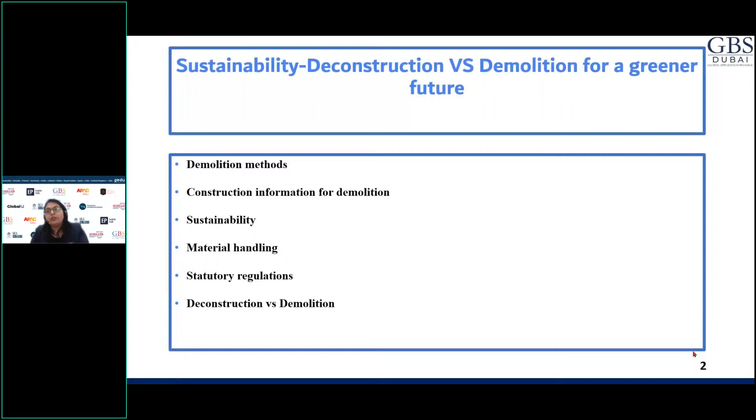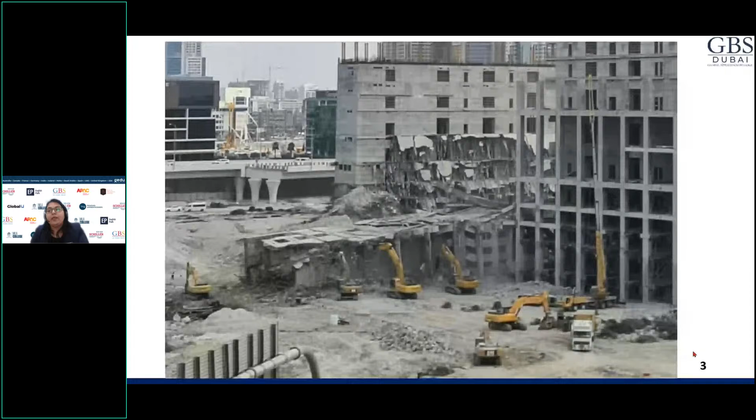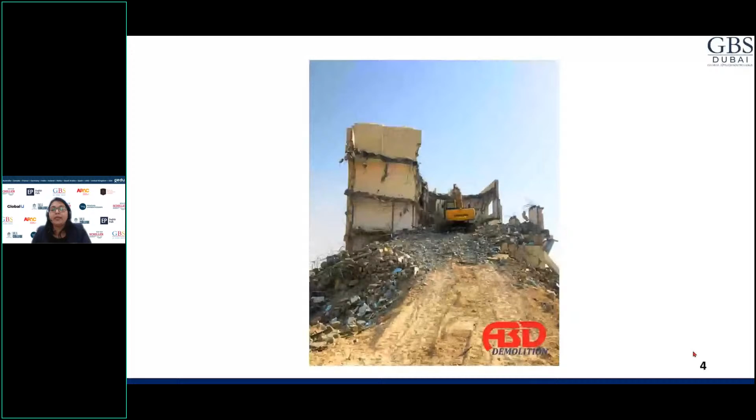Some old buildings, because of their historic importance, they will try to renovate to the maximum, but in some cases, they will be allowed to decay and eventually collapse. But that is not applicable in this landscape, because that will be considered endangered or dangerous to all the people, and then it will be demolished. So this is the third case wherein the building will be demolished.

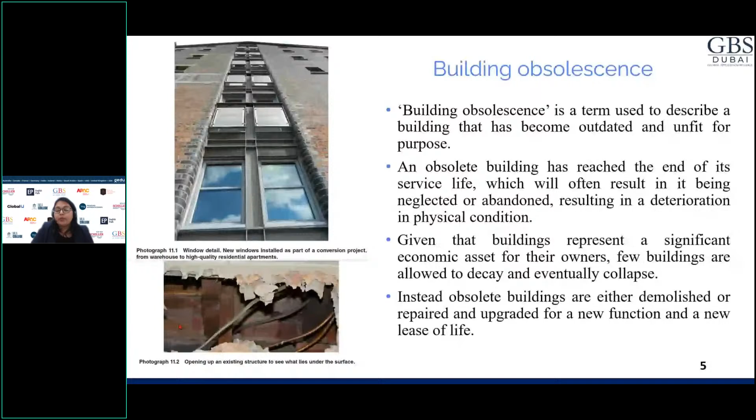Let's see some of the demolition methods. Mainly we can do it by using hand demolition, by using machines, or by using overturning or wire rope pulling, and by using explosives.

Some of you must have seen these kinds of demolition methods, and as a child I was always fascinated. I've seen some buildings, some videos, some pictures where the demolition of certain buildings, bridges or any kind of structures happened. So let's go through these demolition methods in detail.

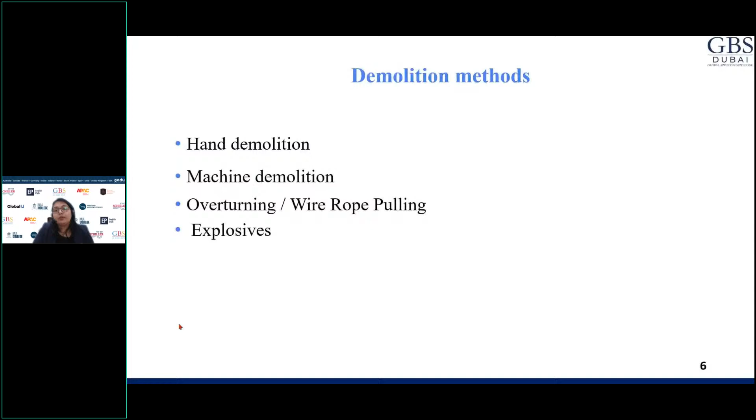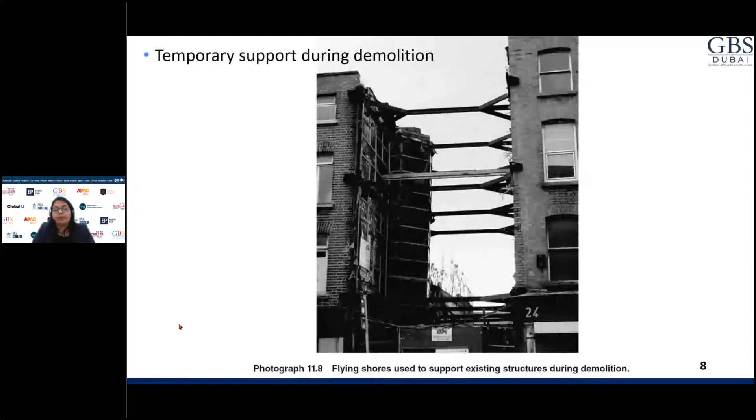Now, let's focus on hand demolition. This hand demolition will be done for simple projects, meaning only a part of the project may be required to be demolished, to be removed. When it comes to works like rework, it can be considered as hand demolition.

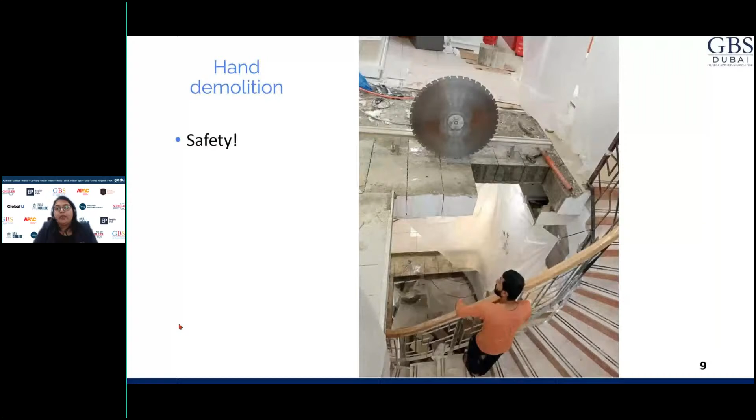Now, when it comes to slightly larger buildings, you will go for machine methods. Machine methods are of two types. One is the ball and crane method, which we also call the wrecking ball method. And the second one is by using demolition excavators.

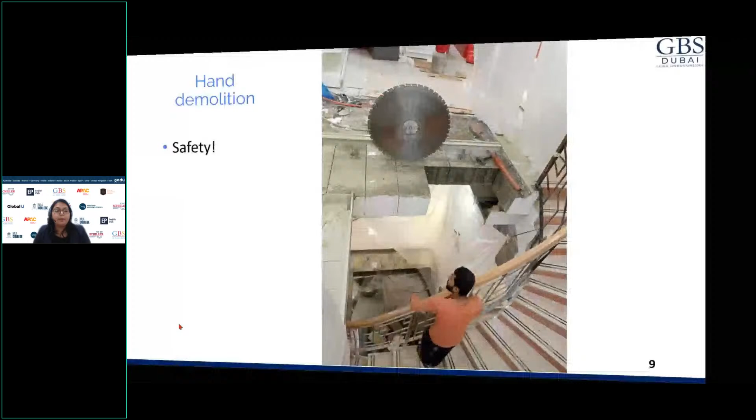Now, let me show you an example of wrecking ball demolition. Okay. All right, there is an advertisement which will be, yes.

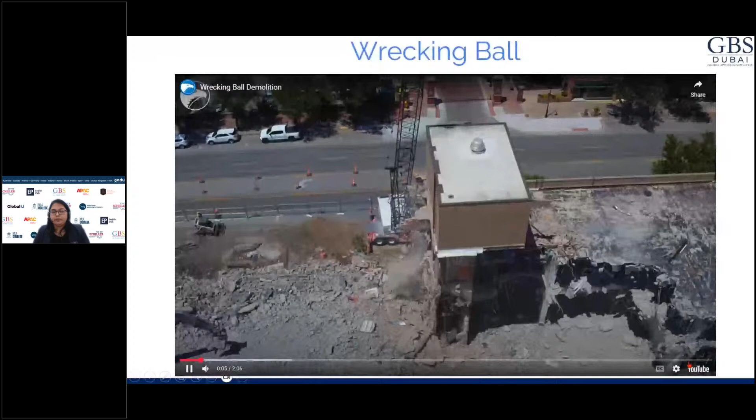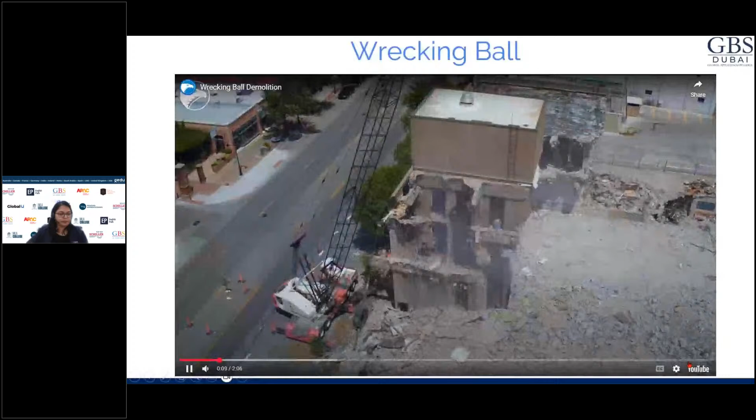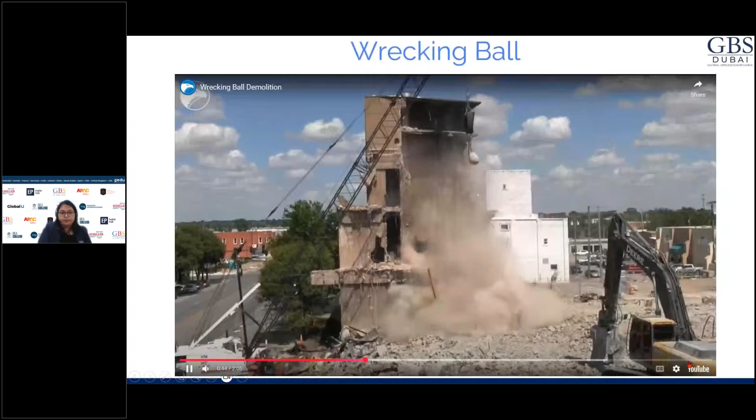You can see here a wrecking ball and crane arrangement which is used for demolishing this old building. You can see it's a rural area, not thickly populated and so on. Yeah, this is a demolition excavator which has been used to remove the further debris.

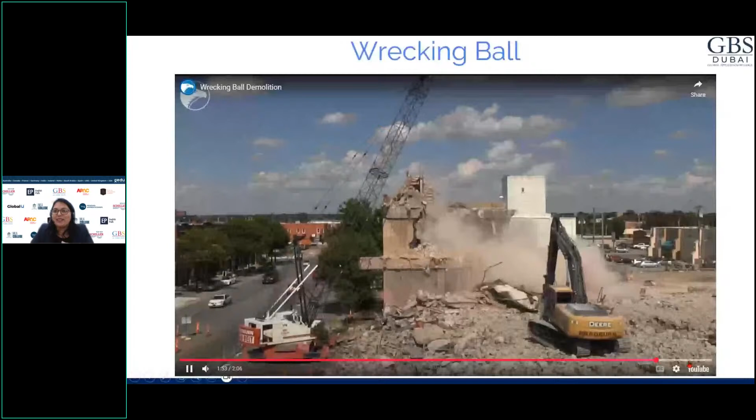All right. So you have seen the video of how this works. Usually it is a combination of different methods that is used. And if you see the noise, the vibration, the flying debris, the practices followed are not up to the mark. So these kinds of methods are only applicable in rural areas, and there should be a fencing arrangement, which is missing on this site.

And you could see a lot of people who were fascinated and looking at the demolition process instead of taking care of their safety, right? Because there is always a chance of collapse at any moment when you're trying to demolish. So there are different regulations in place for demolition, especially in UAE.

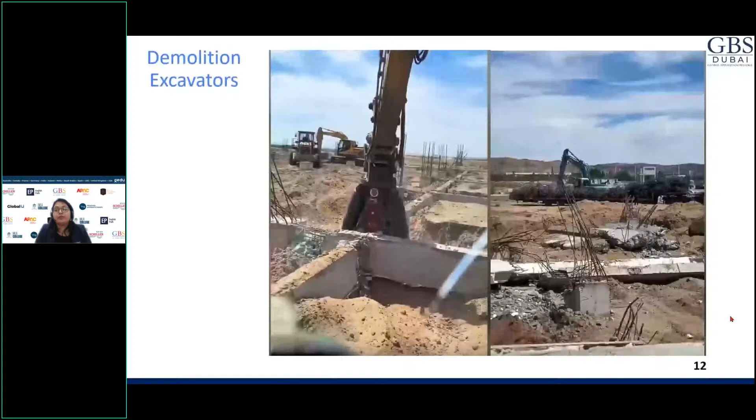So this demolition excavator is used in these kinds of confined areas and also for small buildings. But the wrecking ball method you can use for rural areas where you don't have many buildings nearby, and where noise and vibration will not be much of a problem to other people.

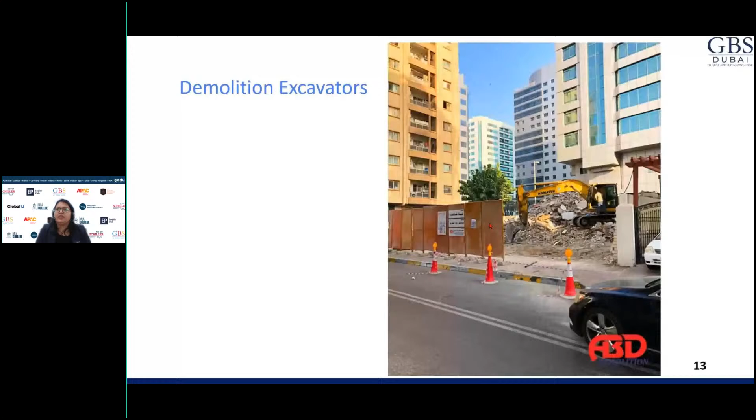Explosives. I'm sure you must have seen a lot of videos showing the demolition of multi-story buildings. So definitely when the project is huge, which needs to be demolished, and is not yet completed or was on hold for many years, they make use of explosives to demolish a building.

Sometimes within a minute, within 10 seconds, and so on, there'll be flying debris, but they make sure that with the design there will be minimum damage to the surrounding buildings. There will be vibrations, and surrounding buildings need to be protected as per the law. And if there are any roads near these kinds of buildings, people will be evacuated, and there will be road closure throughout the day or maybe till certain times.

After the explosion, they have to clean up the dust from the surrounding areas before they get a demolition completion certificate. They also have to make sure that there has been no damage after using these kinds of demolition methods.

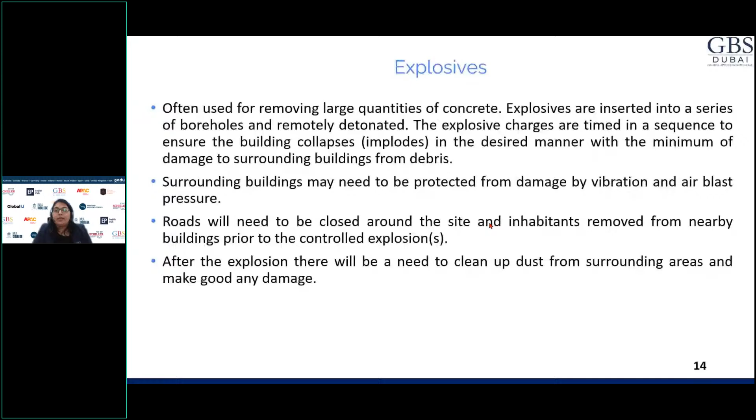I'm going to show you another video which will give you information about explosives, if you have not seen any of these kinds of videos before.

This is a controlled explosion, which was done in 10 seconds, combining 144 floors across all 4 towers together.

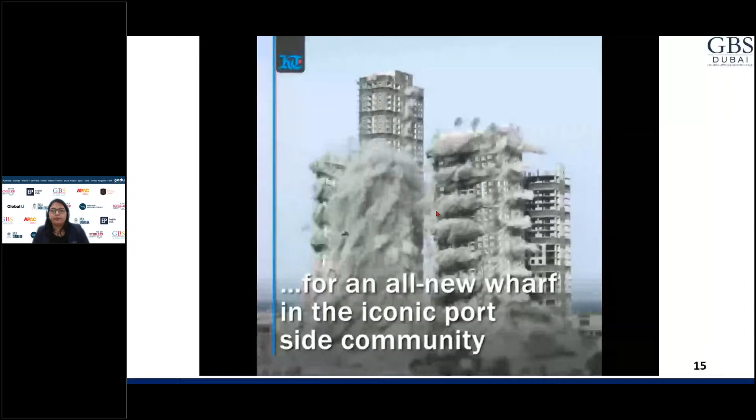By using any of these types of demolition methods, you need to have construction information in place just like any other building.

For demolition, for getting the approval, you need to have as-built drawings. Along with that, you need to have a building manual in place, which gives you information about the specifications, the materials that have been used, and all the maintenance that has happened throughout the life cycle of the building if it was used. Building information modeling, using software like Revit or similar, will help you in the process of demolition.

You can see in this picture, taken from Build in Dubai, the website which gives you information about Dubai municipality regulations. Here you can see, starting from building design, when it comes to owner services, and when it reaches the building after completion, which has been used for either renting or selling.

After that comes building maintenance, and modification if required. They will try to see if the building can be reused, repurposed, or anything else. Only after that, if it is not fit for purpose, will they go for demolition, which is also a sustainability criteria.

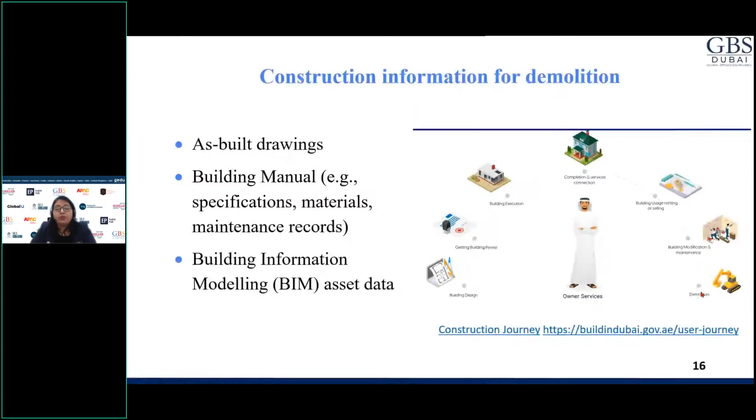The information that needs to be gathered before any demolition process, we call it a demolition survey. You need to find out the existing services, which could be live or already taken out, so the existing building services details need to be understood. In an old building, sometimes we don't have BIM data or any other information, so you have to actually check and find out these existing services.

Then, if there are any watercourses, be it natural or man-made, you need to understand that. You also have to understand the presence of any building materials which could be hazardous, used during construction or during maintenance.

You will have an idea about the distribution of loads, how the loads are being distributed, which is a critical factor in demolition design, and the condition of the building structure. If it is highly unstable, they have to consider it as a risk and go with some precautionary measures.

You have to identify all the risks and hazards involved, because this is one of the most dangerous operations in the built sector, along with the distribution and position of reinforcement.

You need to know the allowable loading for each area, whether demolition equipment can be placed on it, and the stability of the structure. You also need a survey of neighboring buildings so you can anticipate what kind of damages to expect and how to mitigate them, and how loads are transferred if there are adjacent structures connected by bridges, pathways, or anything else, along with access to the structure. Everything needs to be surveyed before these kinds of operations.

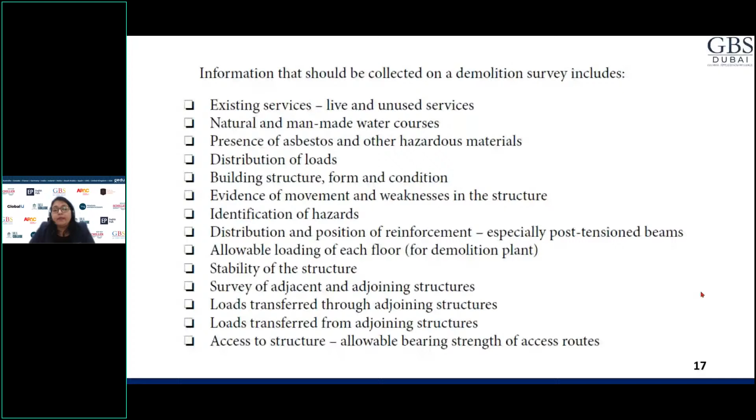Health and safety is a must, along with recycling and reuse of materials and disposal methods. If anything remains, there will be minimum waste to the landfill after sorting the materials which can be reused. Those things need to be included or discussed prior to the demolition.

After demolition, they again conduct a survey to determine the extent of damage to neighboring properties, and there will be clauses mentioning what could be done in case of any damage. Every time, demolition procedures are carefully undertaken, and it is the contractor's responsibility to clean up all the dust and debris from the surrounding areas after demolition in order to get the demolition completion certificate.

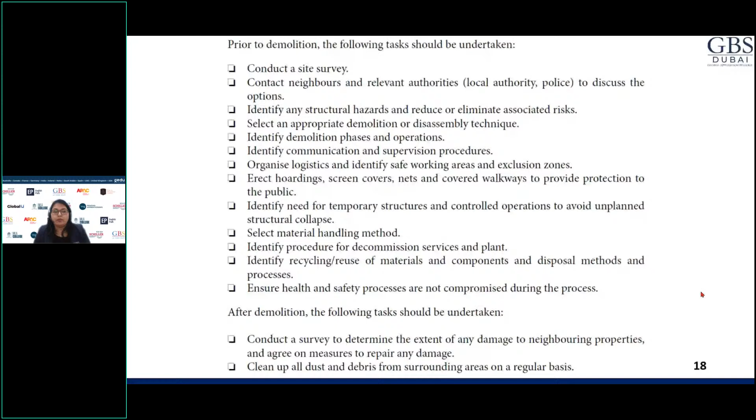In order to establish the noise and vibration that you hear during construction projects, I'm going to show you another project. As you can see, you can hear the noise, and you can anticipate the vibration when it comes to these kinds of structures.

Sometimes they will have to use demolition excavators initially in order to minimize the load for demolition in this case.

Let's talk about stages of demolition if the building was in use, and they had to demolish it for some reason. Maybe they would like to redevelop the area, or maybe the building has completed its design life and is no longer fit for purpose, or any other reason which leads to demolition.

If the building was in use, they can initially do a process known as stripping out, wherein all the valuable materials, components, and equipment that could be reused are removed very carefully as a safe extraction of items, and their value can be retained. These components, once safely removed, will have some commercial value.

Following this soft strip, you can go to the main demolition stage, which starts from the top and extends to the floors below and then to the foundations. Always remember the demolition process after soft stripping starts from the top and follows towards the foundation level, and from the exterior of the building towards the interior, in order to make sure there is no sudden collapse of the building which can cause problems to people nearby.

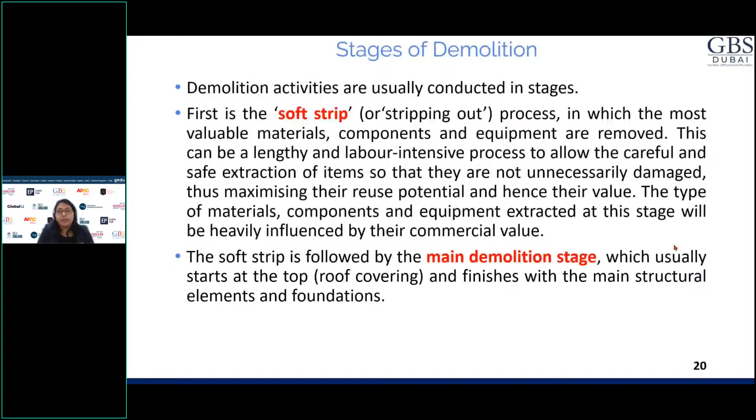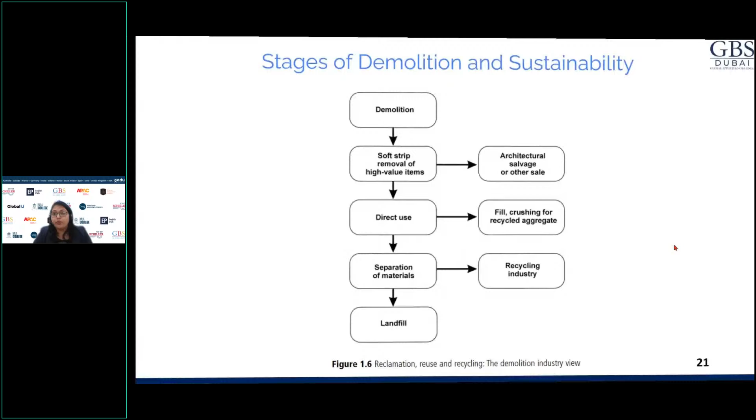When it comes to stages of demolition and how it connects to sustainability: if a building in use needs to be demolished, first is the soft strip, and some pieces will have value, sometimes higher value, which can go for architectural salvage or other sales. Some items can be directly used, and sometimes they need to go for recycling, where those items are separated and sent to the recycling industry.

After the separation of materials, there will be some materials which cannot go to the recycling industry, but have to go to the landfill. So what we aim for is minimum wastage towards the landfill.

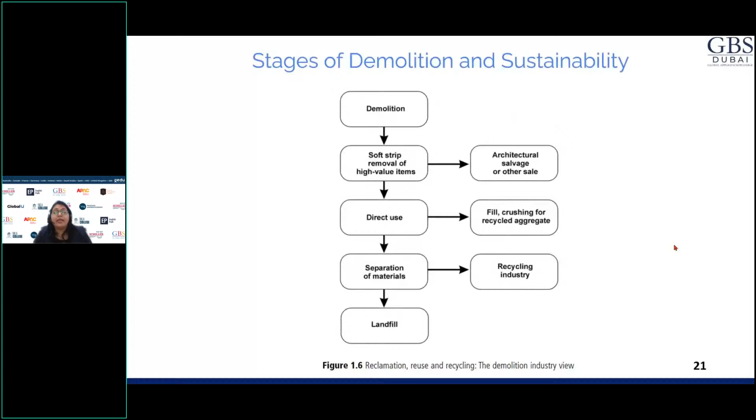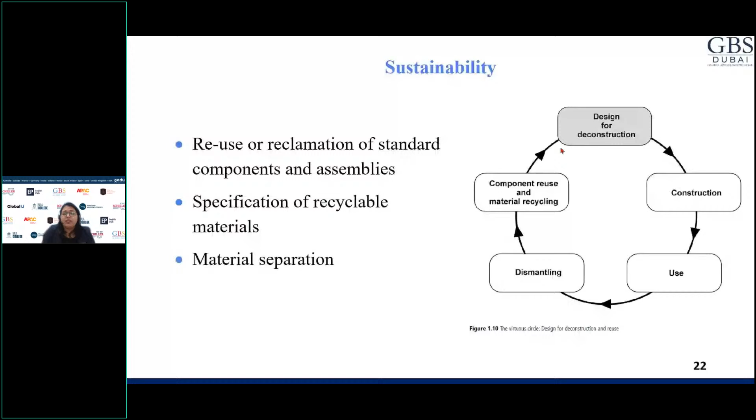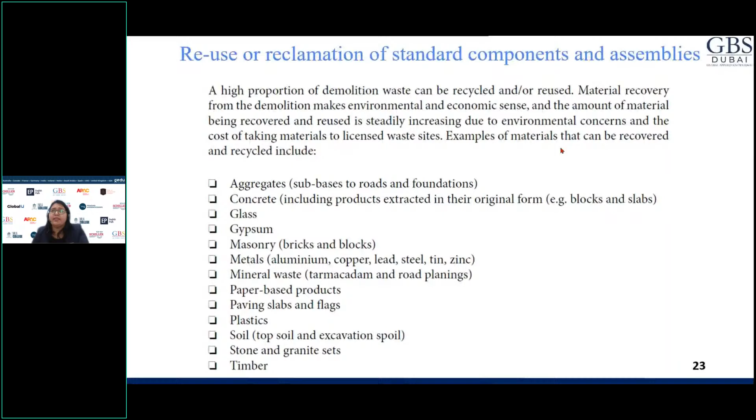The examples of materials that can be recovered include aggregates, concrete, glass, gypsum, masonry, metals, some mineral waste, paper-based products, soil, topsoil, some excavation spoil, timber, stone, granite sets, and so on. Some components we can use as is, like door components or window components.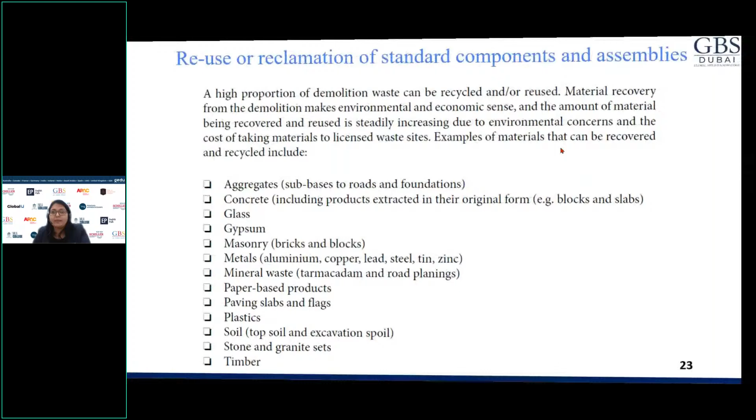That's what deconstruction is - a careful dismantling or disassembly of buildings so we can use materials for new construction projects as is. But some materials need reuse and recycling.

Reused and recycled materials definitely help reduce the amount of materials which will go to the landfill. As an example, recycling equipment can process concrete, which could be recycled and used for making roads, concrete blocks and bricks, and also for landscape projects, sometimes on the same site for other projects.

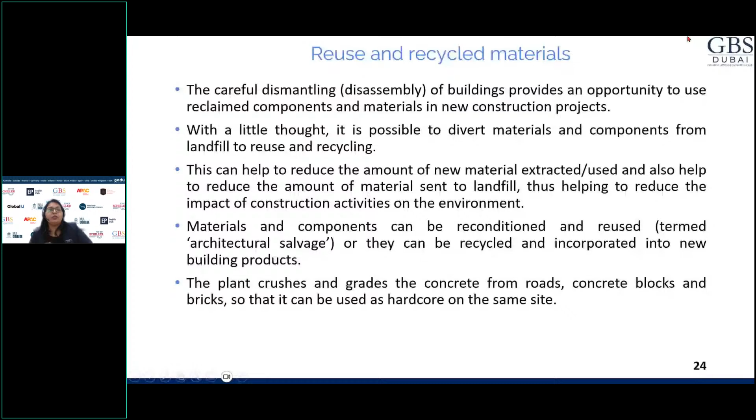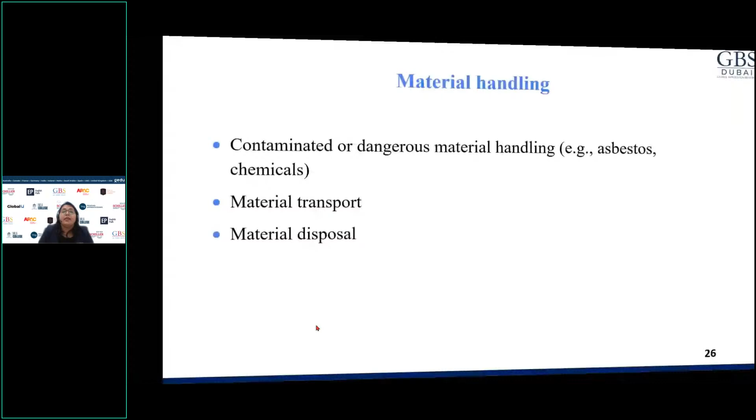In addition to these materials, we will also have other materials, sometimes asbestos, sometimes lead, and many other materials which can cause problems to the people using the site. So personal protective equipment is a must for demolition projects, just like other projects in this landscape.

Contaminated or dangerous materials, if present, will be in different finishes or coverings for insulation or other things that need to be checked and removed before demolition, because you're doing all these processes in a confined space - maybe one not in use for a long time.

In those cases, all the people need to be aware of these situations and material handling. Material transport needs to be taken care of, finally going to the recycling plant, and from there to final disposal at the landfill. All these things are regulated.

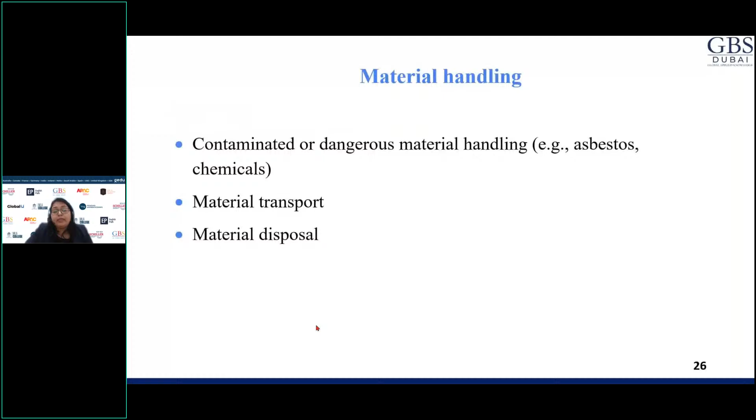Now let's think about the statutory requirements. As I mentioned before, when it comes to demolition, a demolition permit needs to be provided to Dubai Municipality through different platforms.

You have to mention the adjacent buildings, provide a site plan and existing building as-built drawings, and also provide health and safety regulations when it comes to demolition.

This includes which technique you are taking, if using mixed methods, how you are going to mitigate the risk, how you are going to provide a safe environment for all the people working there, safe access for demolition, and whether the public needs to be aware of any restrictions on the site.

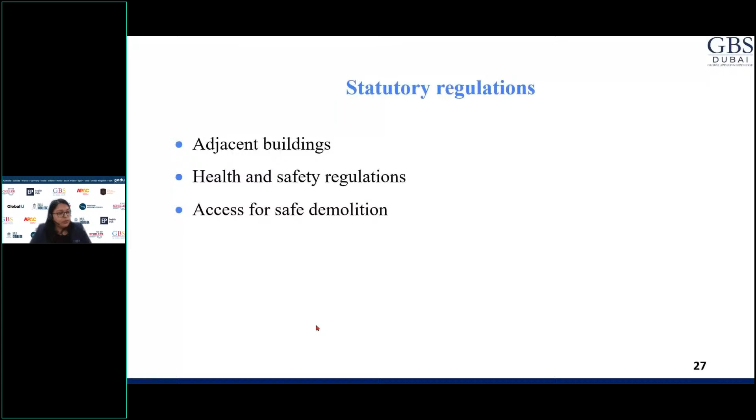Without a Dubai permit for demolition, you will not be able to do any kind of work. Along with your setting out plan, which needs to include the area to be demolished, there should be an engineering survey related to seismic or vibration testing when it comes to controlled explosions.

You also need a no objection certificate from relevant authorities - from DEWA and the telecom service provider if using a mechanical method. For controlled explosions, usually used for mega or multi projects, you have to get approval from different relevant authorities.

You also have to provide a layout of fence, which is mandatory, and give information about the method statement - which methods and techniques you're going to use, how you're going to manage the whole demolition procedure, the specific health and safety and emergency plan, and all the risks associated and how you're going to mitigate them.

The impact of demolition on surrounding or neighboring buildings must be submitted, along with photographs of the site. Depending on these details, the municipality will give approval for further procedures - this is a mandatory requirement in this landscape.

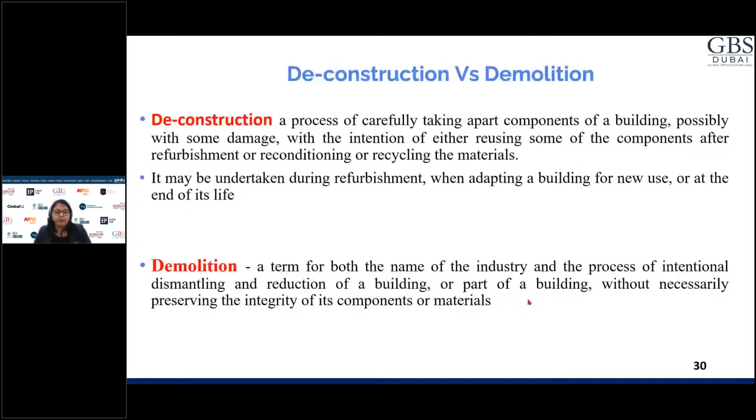use deconstruction for sustainability. Demolishing a house most often looks like this across the US.

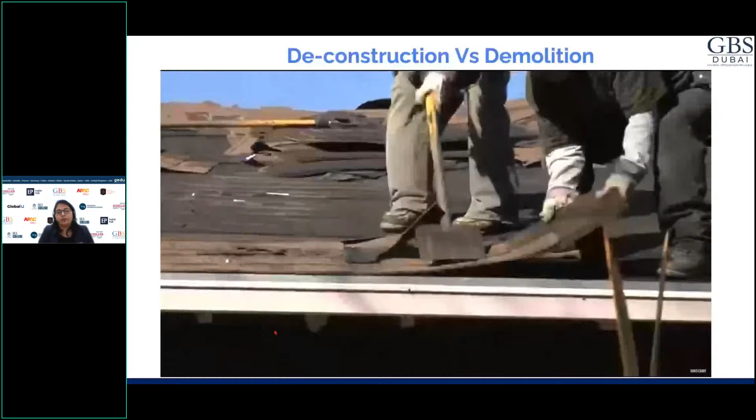But in some areas on the West Coast, houses are now torn down like this, without wrecking balls, but with workers who disassemble the building piece by hand. The method is called deconstruction, and it allows homeowners to reuse or donate most building materials of the house and

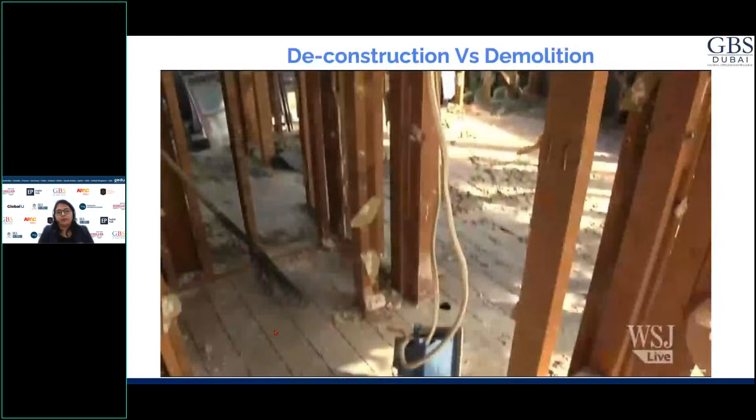get substantial tax benefits in return. Deconstruction involves more labor, but you end up with materials that have a value. And when the deconstruction prices came down to a point where it made sense, that's when we began to do it as our regular routine.

This is the second home deconstruction for Palo Alto developer James Witt. After more than 3 decades of building homes in the area, he switched to the new method last year. Mr. Witt paid $15,000 for the disassembly of the bungalow.

An outside firm appraised the materials that will be donated. And come tax time, Mr. Witt expects to get enough money back through deductions to offset the entire cost. A regular demolition would have been less, about $12,000, but he wouldn't have gotten any tax benefits.

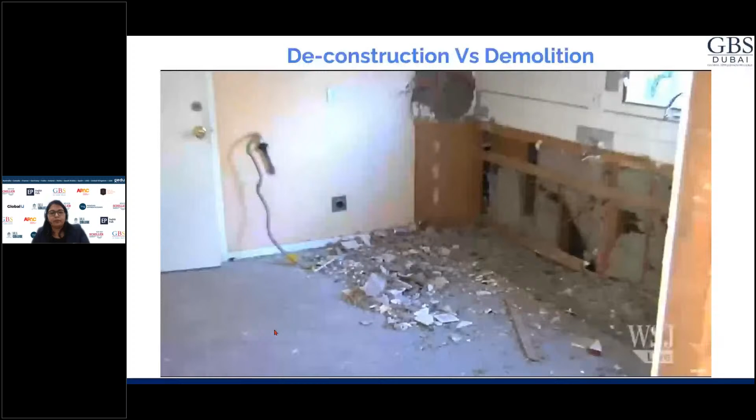Mr. Witt says it's not only the financial incentive that convinced him. I think it's part of the community understanding that we're not just there to make a quick buck and move on. We're proud of what we do, and we try to have the smallest footprint we can and still build new houses.

Deconstruction is a growing trend in California, triggered by the movement to more eco-friendly building and stricter environmental laws that regulate what ends up in the landfills.

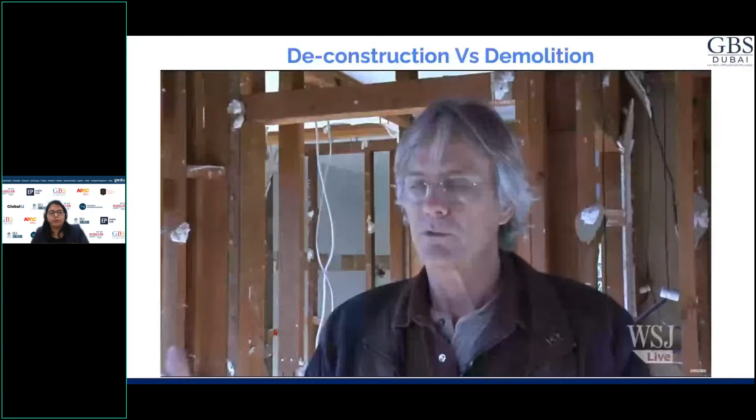This is a big part of why we deconstruct. Roderick Cooper is owner of a deconstruction company in Palo Alto. He says about 30% of all houses that are torn down in the Bay Area are now done through deconstruction, up 10% from 5 years ago.

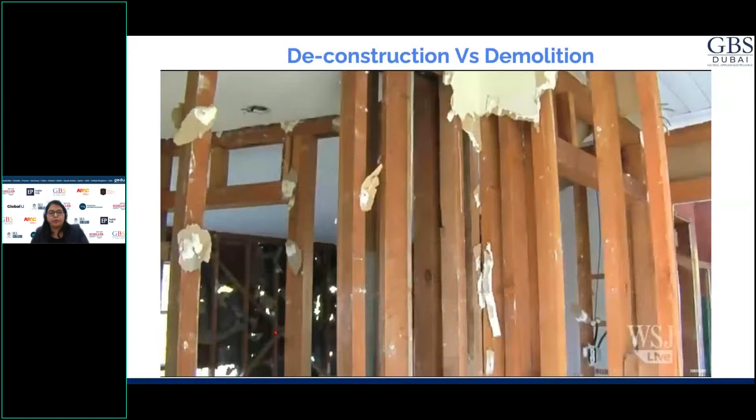Mr. Cooper was hired by James Witt to deconstruct his house. He says 85% of all building materials will be reusable, from the lumber and the roof tiles to the doors, windows, lamps, and even the water heater.

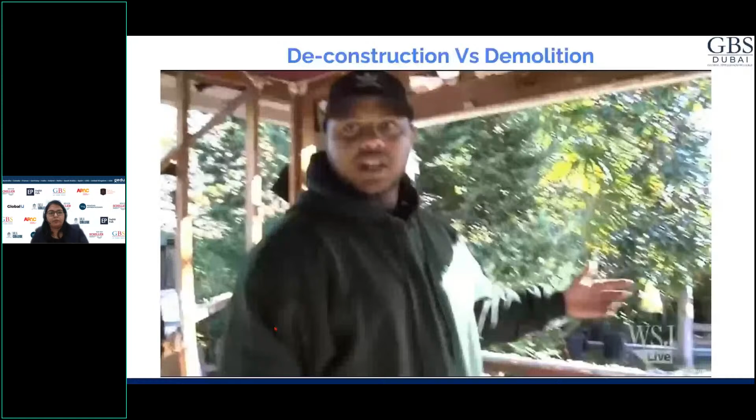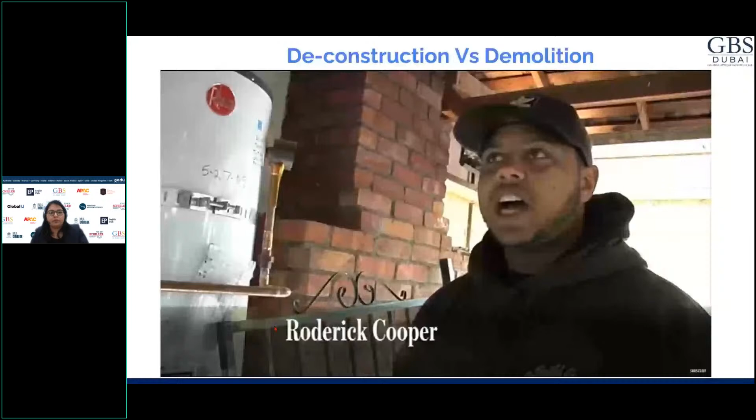This is a prime example of why we should deconstruct homes more than demolish them, because material like the water heater and the sinks, floor tiles, ventilation vents, cabinets can all be put in a new home. In less than 1 week, the deconstruction will be complete. Then all reusable materials will be sold to nonprofits and directly to the public.

Kay Liu had her house deconstructed about 6 months ago. The former PR executive and her husband decided to tear down the 1,600 square foot house that was here before and use the lot to build a 3,200 square foot, 4-bedroom home.

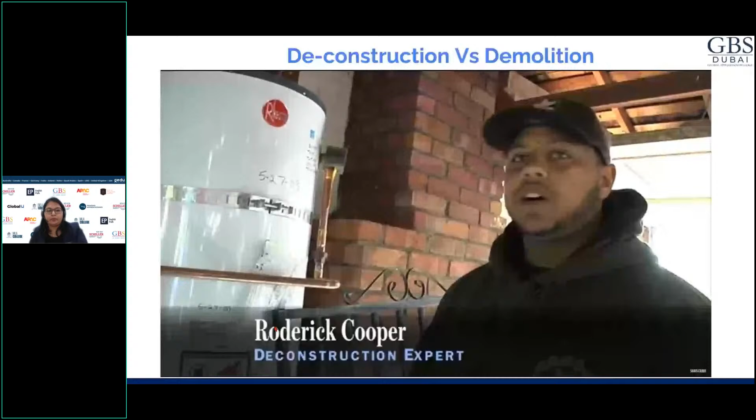We bought the house from the original owners, and they had actually put a fair amount of money into remodeling it, and it just seemed like a waste to take a bulldozer to it and a wrecking ball and throw it all away.

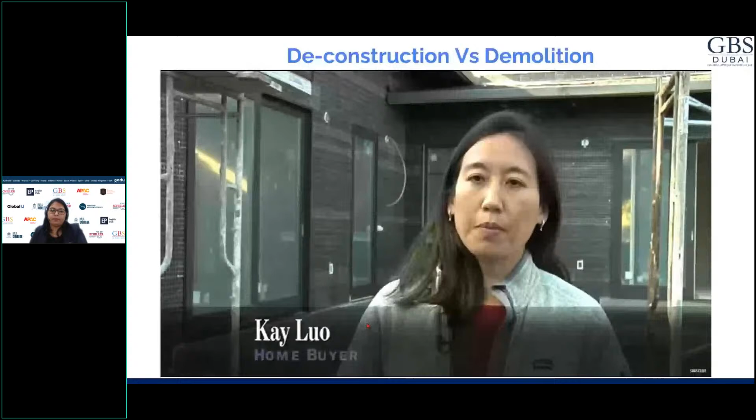Kay Luo expects the tax credit to cover the entire cost of the deconstruction. She was able to recycle about 73 tons of debris and building materials from the former house. Not all of it was donated, though. Ms. Luo kept some of the redwood siding for her new home.

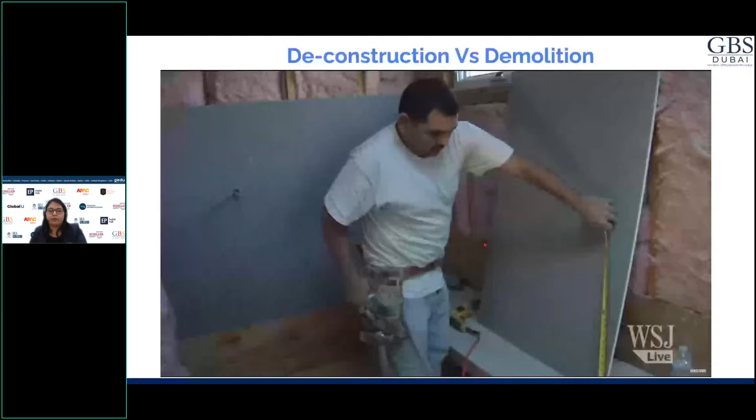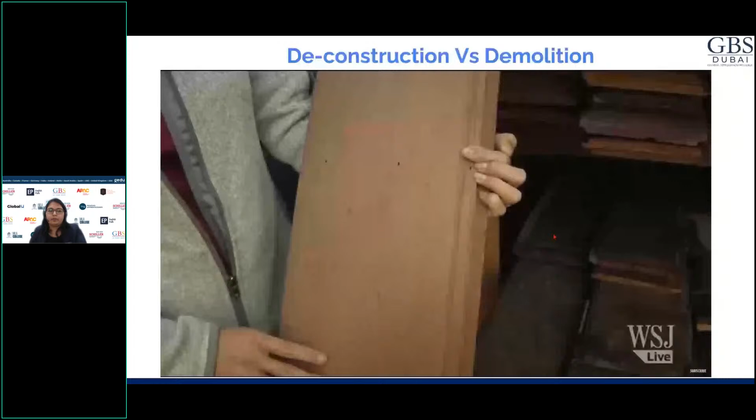I think this is the best part of the deconstruction, the fact that we can sort of take part of the old house and reuse it in the new house. And you just can't get wood like this anymore. It's just beautiful color, it's a tight grain, it's going to be one of the highlights of our house.

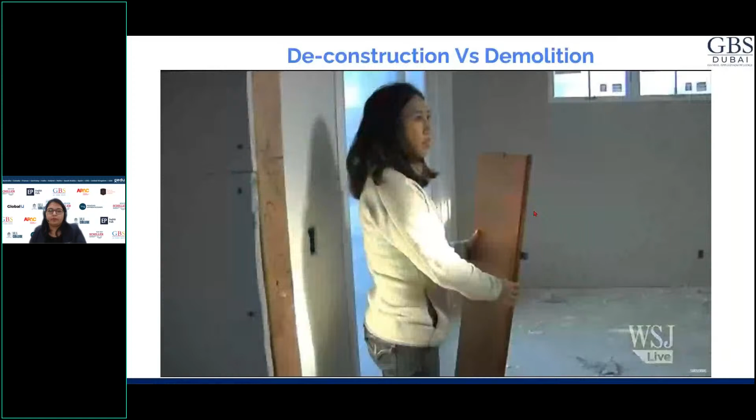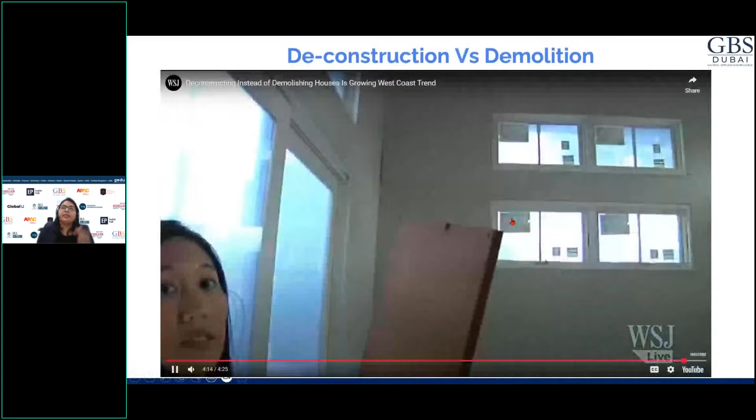All right, with that, I hope you understood the deconstruction and demolition and how it differs, and different demolition methods, such as we discussed about wrecking ball, and then we discussed about demolition excavators, explosives, and what are the construction information for demolition, and how sustainability can be incorporated in this demolition process, and the statutory requirements that need to be strictly followed for the safety and for the greener future.

Right, material handling is another one, and with that, these are some of the references I have taken, and that's all from my side. And I'm happy to address any questions or any queries that you might have.